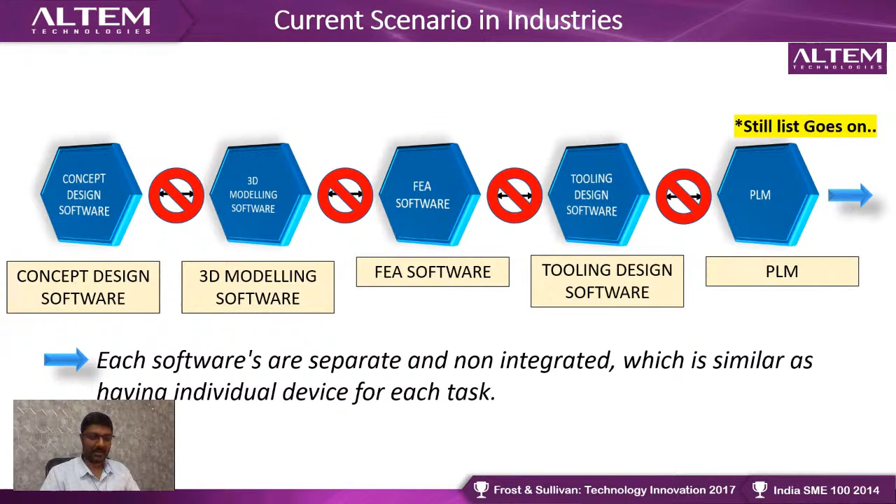Similarly, if you compare this with the mechanical industries in the current scenario, there are many areas with respect to the design field. Conceptual design software is available, 3D modeling software is available, FEA, finite element analysis software is available, tooling design software is available, PLM, product lifecycle management software is available. Each of these software is non-integrated, and working together as a team is very difficult. So what is the problem with non-integrated applications?

Suppose we take the example of the offerings from Dassault Systèmes. Dassault Systèmes has CATIA V5 for modeling, and they have Simulia for doing simulation. If you create a part in CATIA V5 and save it, the extension of the part is .CATPart. But if you see the Simulia software, the input to Simulia cannot be a .CATPart. So the .CATPart file needs to be converted into a neutral data format, that is either STEP or IGS.

And that IGS or STEP file can be an input to the Simulia software. During this process, whenever you convert the .CATPart to the neutral data format, there is data loss, which is not professional and which is not recommended. So the companies will face some losses.

With the 3DEXPERIENCE platform, everything is interconnected. No need to convert to the neutral data format. The PLM software is designed in such a way that the CATPart, or directly the file from CATIA, can be integrated and opened in Simulia.

No history is maintained, like life cycle state, revision, modification, data location. So each department in the company will have the same file, but each person will have different revisions of the same part. Tracking that, and ensuring that all the departments have the updated design or updated parts, is a very difficult task.

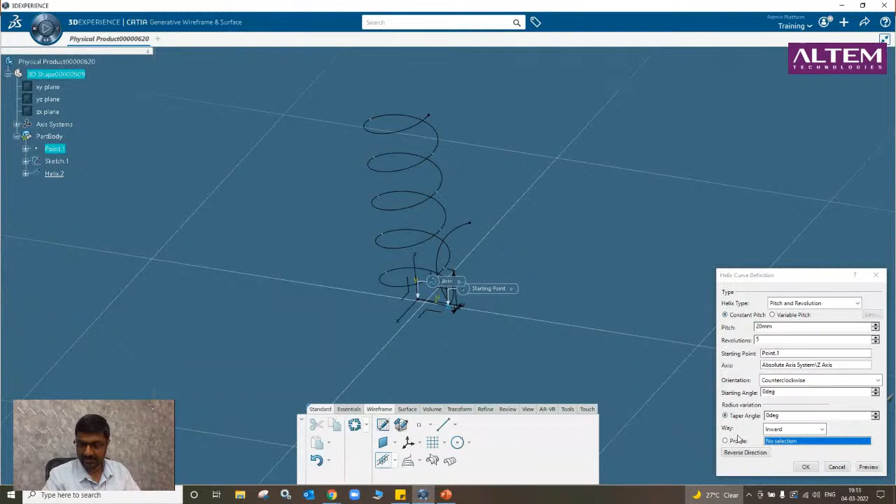Let's see. Okay. Now it is asking for a profile. I will select this profile. The origin is not on the profile. Okay. Okay, this point now, what I will do, I will give it as 0. Okay, now it will work.

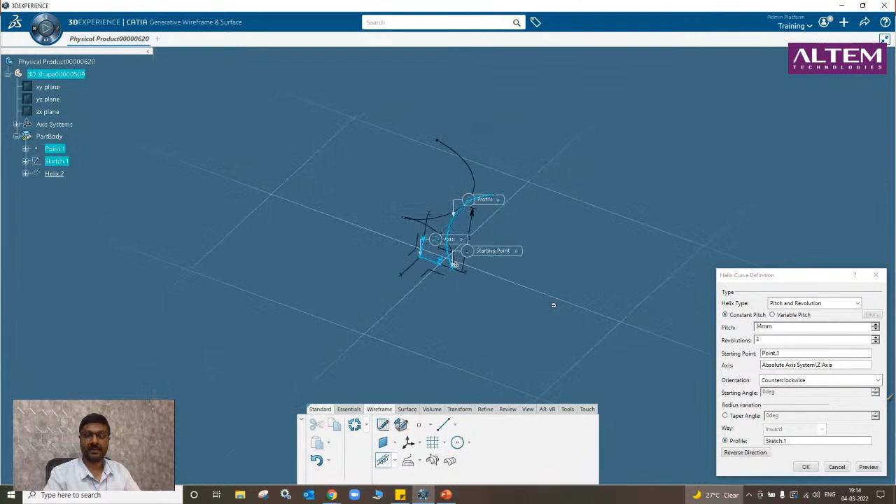First point, Z axis, some 20 mm, some 5 revolutions, and now I'll give it. If you can see, okay, I will give height and pitch.

Okay, it is trying to follow the... If you can see, it is trying to follow this profile. So if you want a spring to follow a certain profile, it is possible. Now I will hide this. Okay. Now what I will do is I will show you how you can build a surface using this wireframe or the profile.

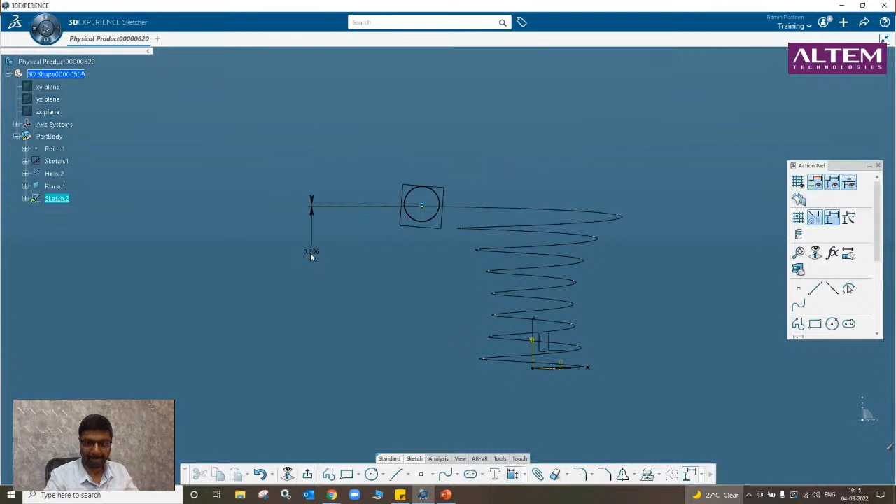I will create a plane. Okay. Normal to the curve. Select this curve and I will select this point. I will take a sketch on this plane. And I will draw a small circle. I will give coincide. Draw a small circle. I'll come out, and there is an option called sweep.

We will get into that. I will explain you the complete sweep option. Yeah. I'm not able to find the sweep option. Sweep. Okay, with reference surface, I'll click this and I'll click this, and you can see a surface is formed. Okay, I will hide this wireframe.

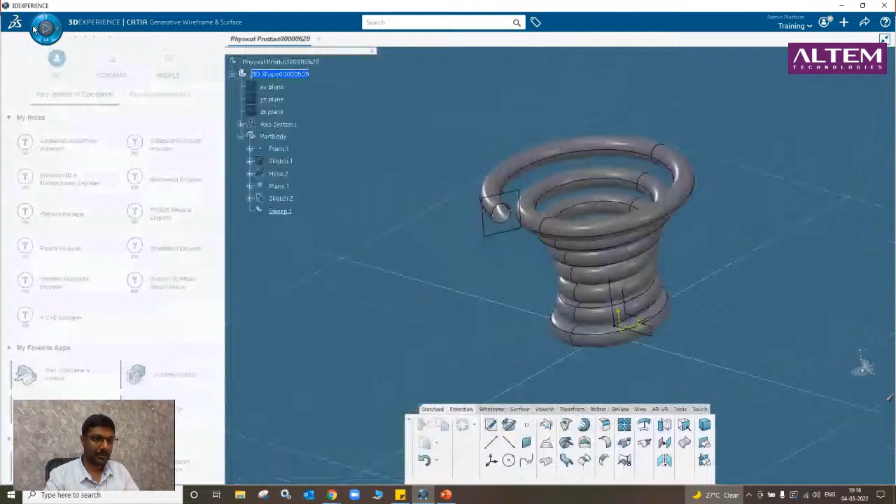Okay, I am in generative wireframe and surface. I will go to the part design workbench. Okay, and there is something called close surface. We can convert this surface into solid. Close surface. I'll click on the surface and I'll click OK. Now I will hide this surface.

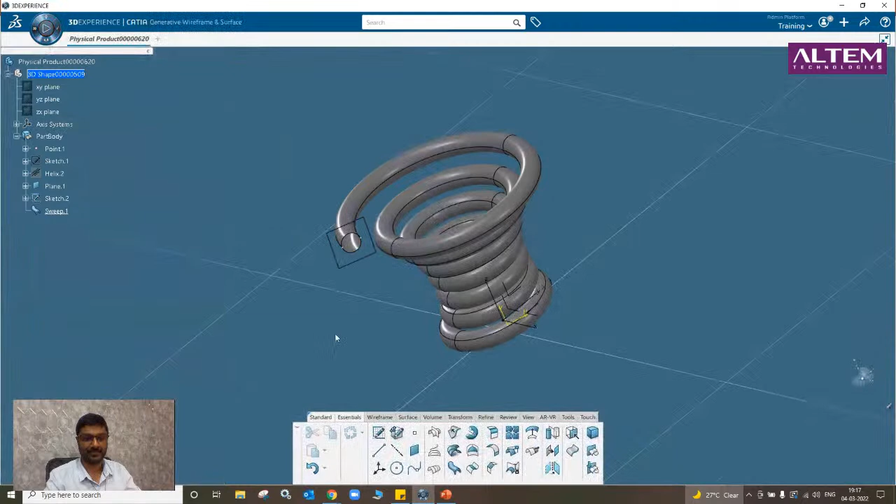Sweep. Okay. Now if I go to review and if I go for section, you can see this is a solid. So this is how you can create a surface and you can close it to make it a solid. Okay. Let me delete all of this.

The second one is the spiral. So what I will do, similarly, I'll create one more point on this XY plane and I will go on the spiral. It is asking for the support. I'll give as XY plane. It is asking for the center point and it is asking for the reference. So it is not possible.

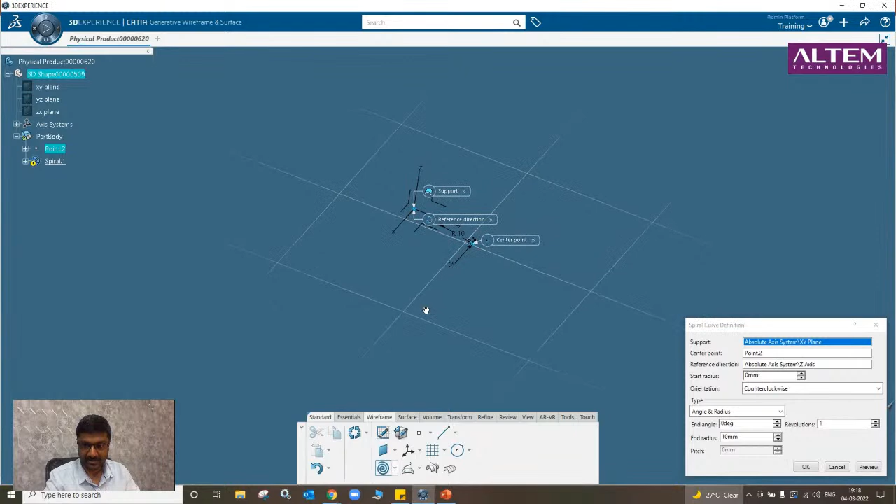Center point as this and reference direction as Z, or reference direction as Y, because this is 2D. And in the same way, there are angle, pitch, and radius. Okay, and we can create the spiral. This is the spiral option. This is one more way of creating a wireframe.

Okay, on the similar line, there is isoparametric curve, which I will be covering later. Before this, I would like to show about this combine. To show this combine option, I have an example. Okay. So suppose you want to draw these curves on a bottle, these grooves on the bottle.

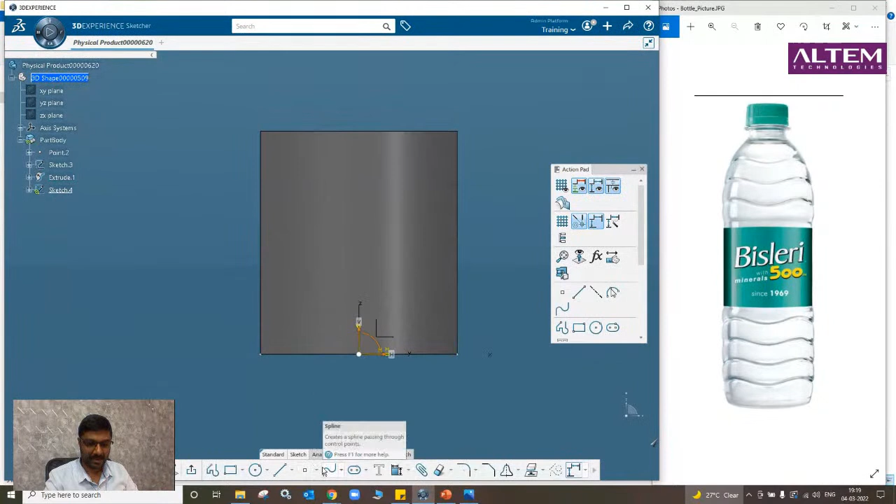So what I will do, I will first take a sketch on the top plane. I will draw a circle. I'll just come out and I will extrude it. I will go through this one by one slowly, but okay. I will click on this. Now I will make a sketch on the front plane and I will take a spline. I just drew some random one, for example purposes. Okay. And I will come out.

Now there is a command called combine. What I will do is select this as curve 1, select this circle as curve 2, and I'll give preview. If you can see, now a wireframe is created. What is the logic?

If I view it in the front view, you can see it is following this sketch 4, and if I view it on the top view, it is a circle. So it has combined both of them. Okay, the requirement or the prerequisite is both the sketches must be normal to each other.

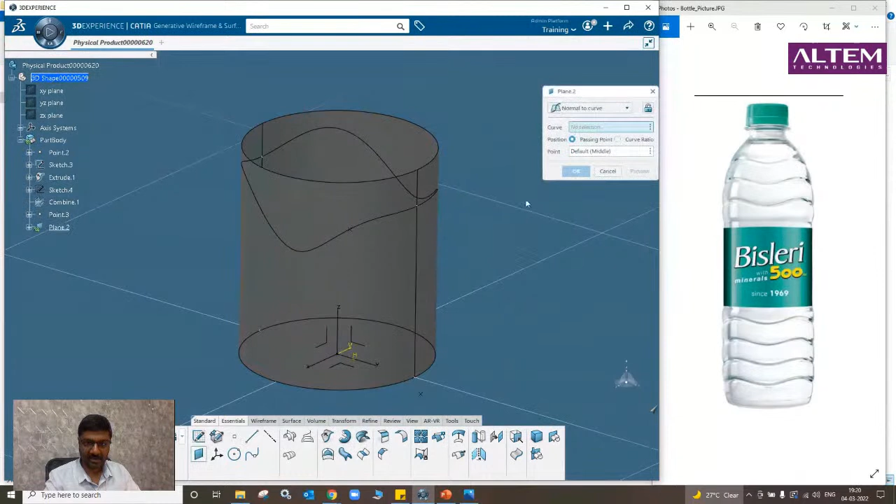Okay. Now again I'll take a point on this curve. I will create a plane normal to the curve at that particular point. Okay. And I will draw a small circle on this plane.

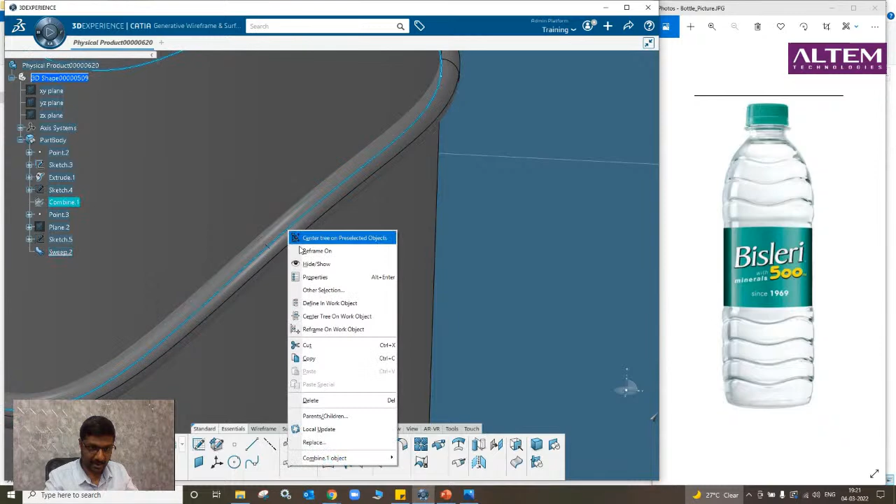Okay. And then I'm going to sweep it. Okay. Now what I'm going to do is I'm going to hide this. Now I'm trying to make a groove. Okay. So there is something called split and trim. I'm going to explain it to you in detail, but as of now, I'll try to explain split and trim.

I will do trim. I'll select this surface and this sweep surface. Okay. And the other side, if you can see, just click OK. Now the groove is done. This is how you can design this groove, which you can see on the Bisleri bottle here. So this is how you can use the combine option to get this kind of groove.

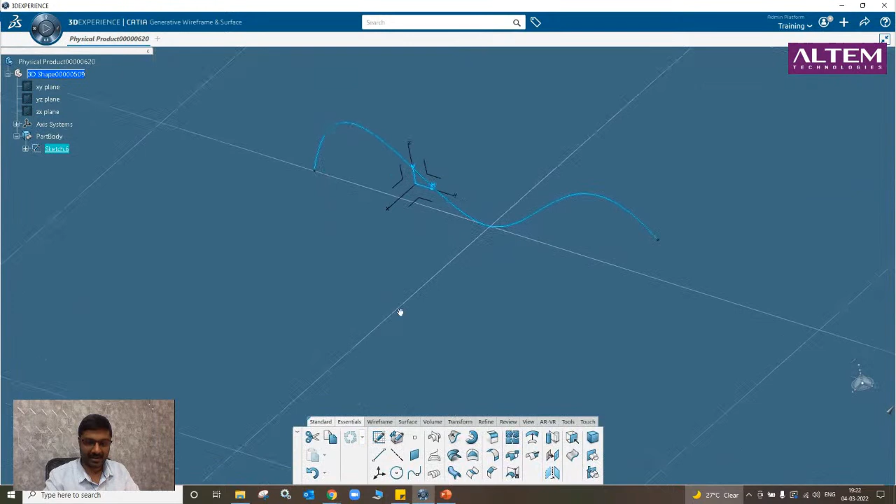So let us move on to the next one. I want to explain about the projection. Say suppose I take a sketch and I will draw a spline. Okay. And I will extrude this. I will take a plane, offset it, and I will draw a circle on that plane. Now I will hide this. Now I will extrude this circle.

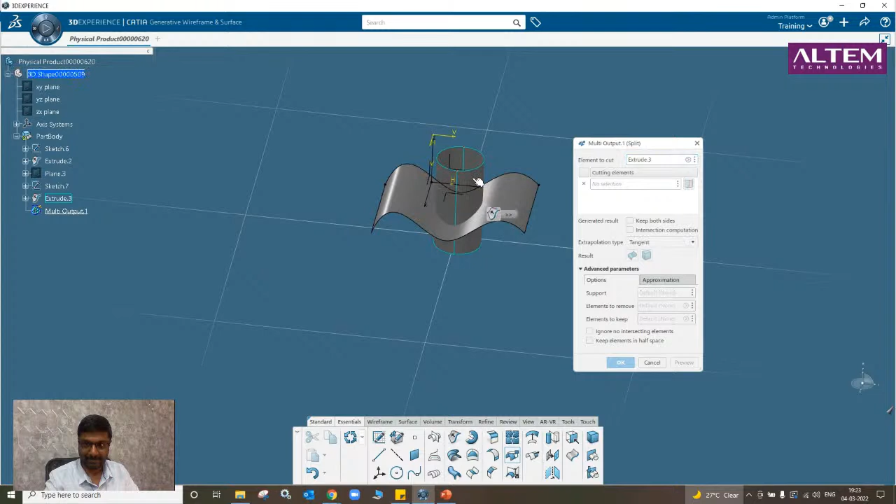Now I will do a split operation. Sorry. You can see there's a circular hole. But what happens if I do projection? I will project this circle onto this plane. You can see it is coming as an ellipse. It is not coming as a circle.

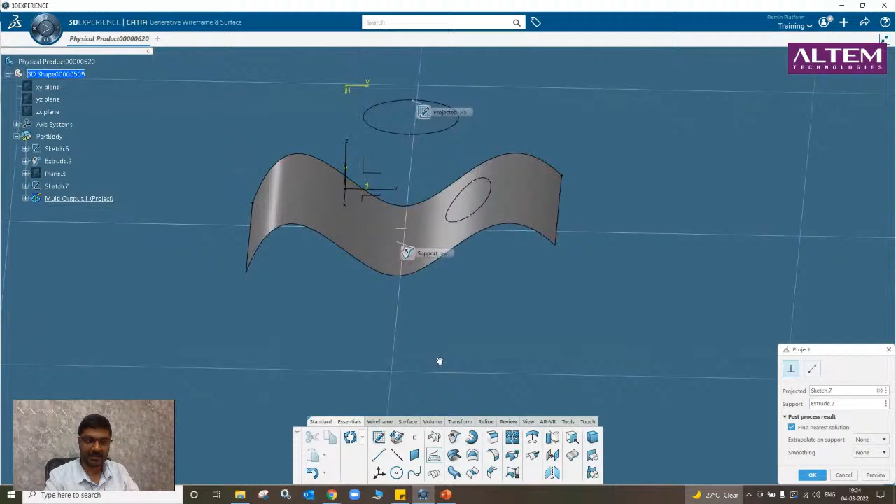So this is what the projection will do. It will try to adapt to the shape of the curve. It is circular, but it is taking the shape of the curve. Hence, it is appearing to look like an ellipse for us. This is where you can use the projection command.

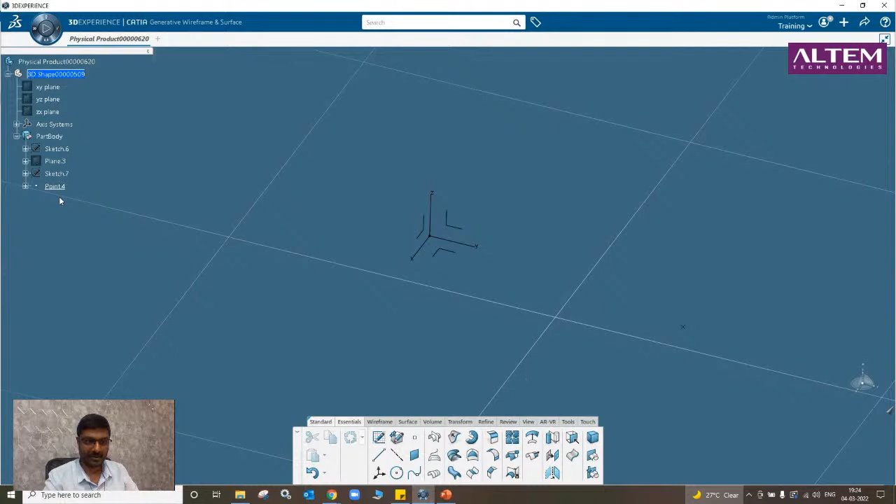Next, I would like to show one more thing. So suppose there is a random point somewhere. I will give some 100, 250. There's a point somewhere here. I'll delete all of this. So this is one point. I'll create one more point just on the ZX plane. Now these 2 points are in space.

Now what I will do is I will take a line and I will give it a Z axis. I'll create a line. I'll give a Y axis. Now I want to connect these two lines. Let me look at that option. There is an option called connect curve. So this is the first point and this is the first curve. This is the second point and this is the second curve. If you want a reverse, you can.

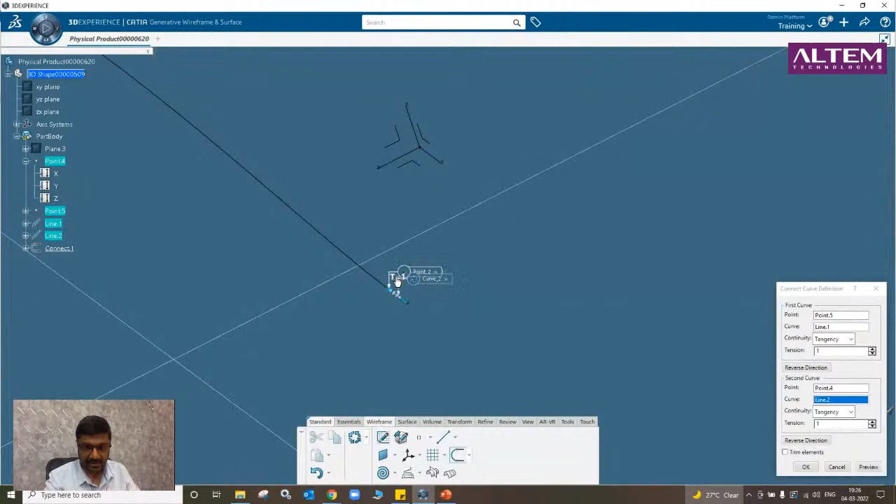So this is a 3D curve. You can change the direction of the tangency. You can change the tension. And you can connect these two curves in 3D. This is the connect curve option. These options will be very useful while you're working with surface design.

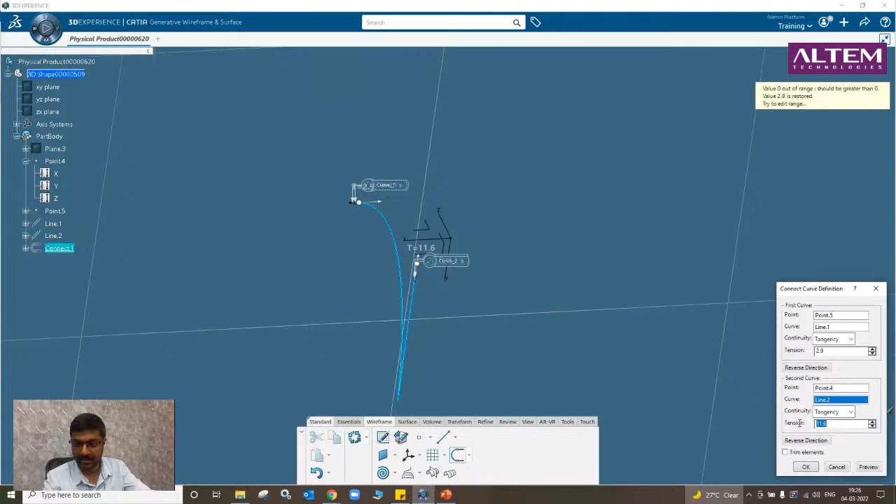This is the vectors. I can give 0, 0. Or I can give 1. Sorry. 1 and 1. I think the tangency should be opposite. This is the connect curve option. So these are some of the important wireframe features which I wanted to highlight and show here.

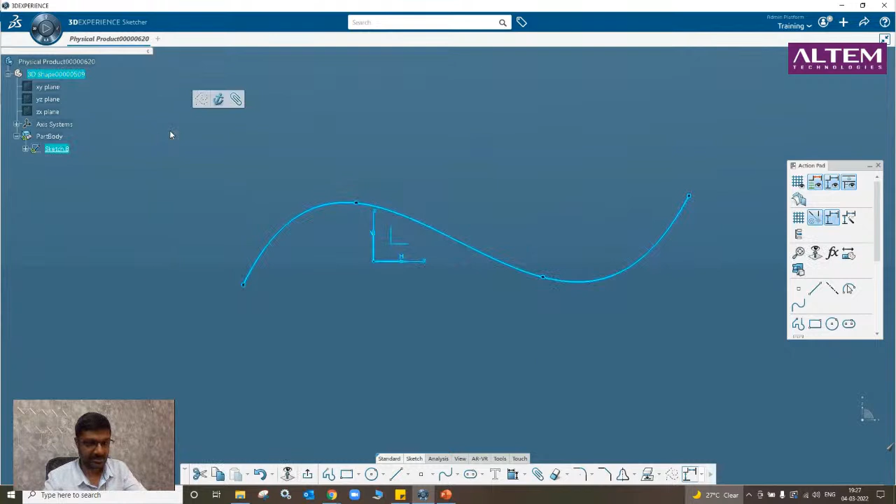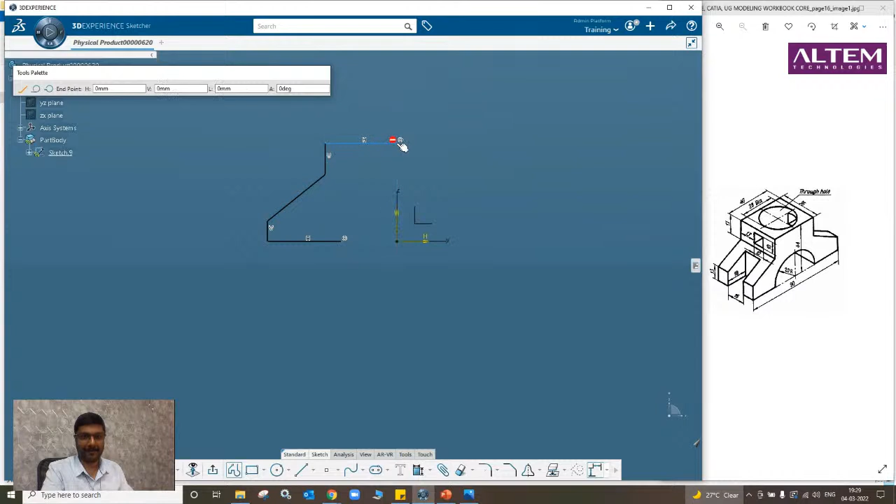So what is the start? How do we start if we have to design this in surface design? First, I'm going to develop this surface, which I'm showing with my mouse, only this front surface. I'm not going to draw to scale. I'm just going to draw rough dimensions in the interest of time. Let me draw this, and I will mirror this. Now I will draw a 3-point curve. First point and second point.

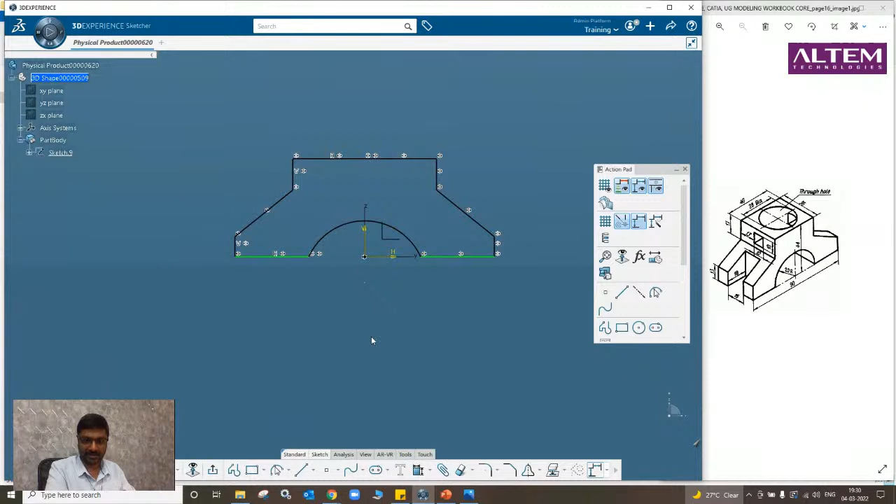And I'll come out of the sketch. Now I have drawn this sketch. Actually, I should have drawn it in the left hand side view. Okay, this is correct. Now I will do fill. There is an option called fill in the surface design, and I'll fill the sketch. You can see my first surface has been now created.

We have to make sure that all the surface design we do under a geometrical set. Okay, we must not do it under part body. So what I will do, I will create a geometrical set. I will cut and paste it in the geometrical set. Okay. Now I will hide this sketch. Okay. Our first surface is now ready.

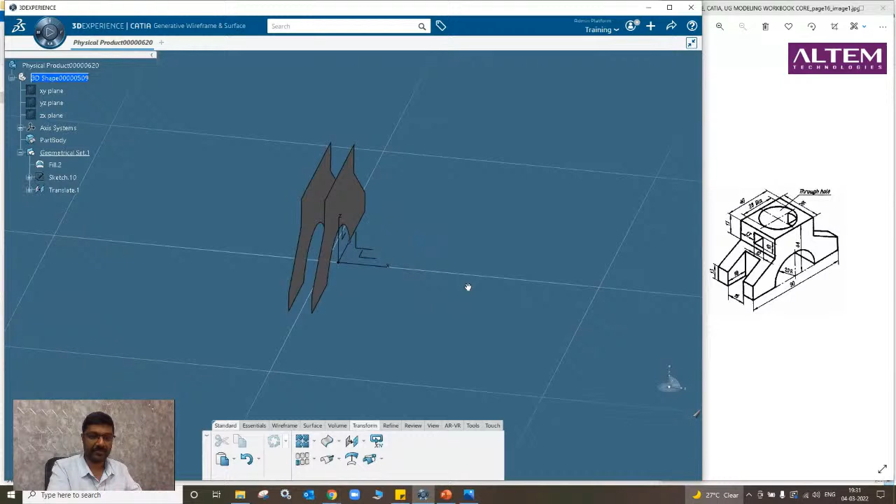I need a similar surface at a distance of 36 mm. So what I will do, I will go to the transform and I will translate it. I'll select this. I'll select this direction. I'll give it as 36 mm. Okay. Minus 36. Okay. Now, actually, I'll give it more so that it looks to scale. I will give around 100 mm.

Okay. Now I need to create the top surface. So what I will do, I will draw a line between these two. This is also part of wireframe, and I'll draw two lines. Now I can fill this, or I can use extrude. So what I will do, I'll go to tools, I'll measure this length, from this point to this point. I'll keep this length.

Now I will come for extrude. I can select any open profile, give the direction, and get it extruded. I will give length 217.568. Okay, and I will hide this. So now this top surface is formed.

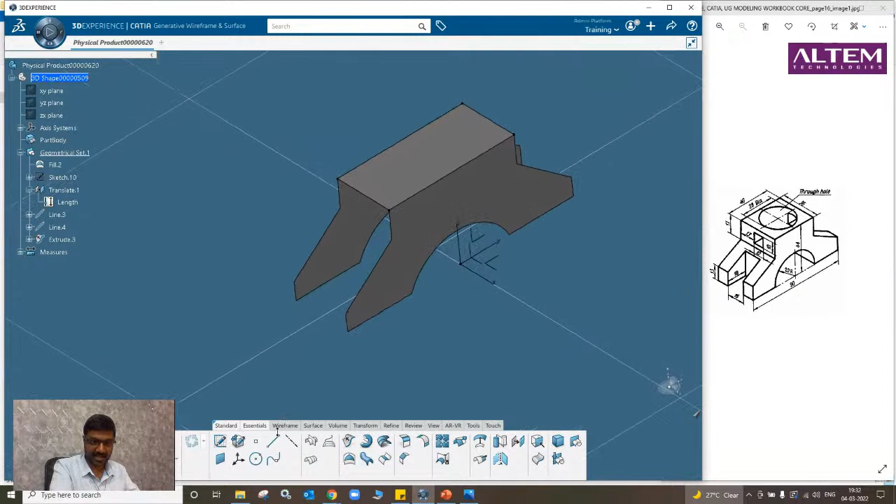Now what about these side surfaces? I'll again draw one more line between these 2 points, and I will use fill. I must select all the edges. Okay, and I will fill. I will take one more line and I will fill. And I will fill this: 1, 2, 3, and 4. Similar way, I will draw the last line and I will fill this: 2, 3, and 4.

Okay. Now I will mirror these three surfaces. Transform and mirror. Symmetry. Yes. Now the surfaces are formed. Now you can see each one is separate; if I hide this one, only this is hiding. So each one is a different surface. I will show you, we can join those. First, let me complete it. There are some small things pending.

Okay, and I will fill up this: 1, 2, 3, and 4. Last line here and here, and I'll fill it: 1, 2, 3, and 4. Now I'll fill up this: 1, 2, 3, and 4. Okay. Now all the surfaces have been generated.

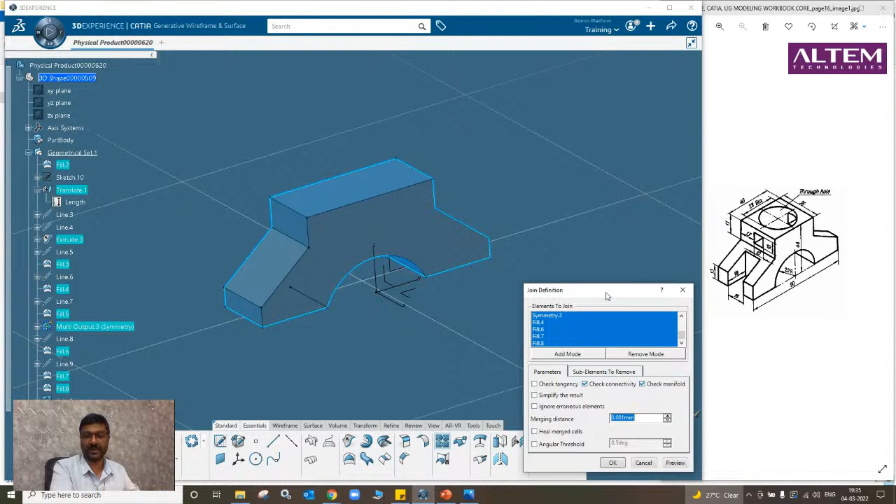Now I need to make this as one surface. So there is an operation or command called join. Click on this. I will click on one surface, right click, and I'll get distance propagation. If you can see, there is a value called merging distance. If there is a gap smaller than 0.001, it is going to ignore it. You can set this as 0.001. So if there is a gap of less than 0.001, it will ignore it and create one surface. Now if you see, it has become one entity.

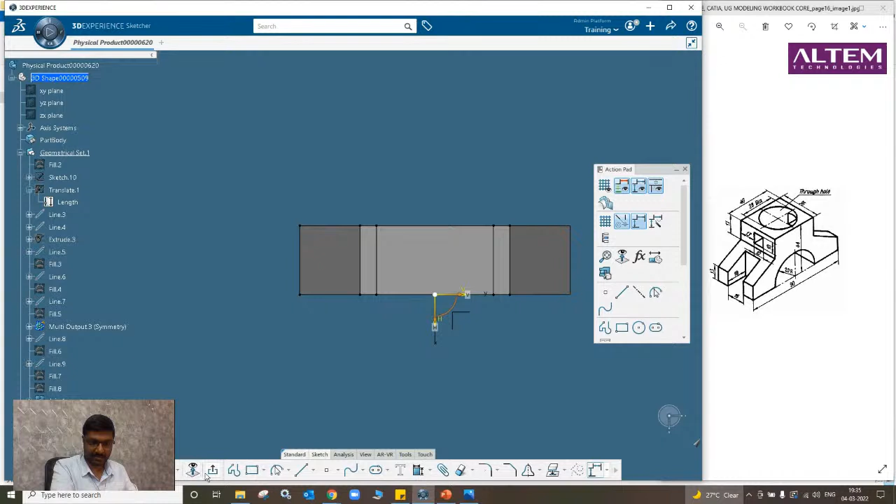Okay, this is done. Now what else is remaining? There is a through hole on the top. I will draw a circle here. Or without going into the sketching, there is an option called circle. For that, I will delete this. I will take this circle. I will draw a point on surface, and I'll give a zero value. Oops, something is wrong. Surface is this extrude, and I'll give value as 0. Okay, a point on the center of the surface is formed.

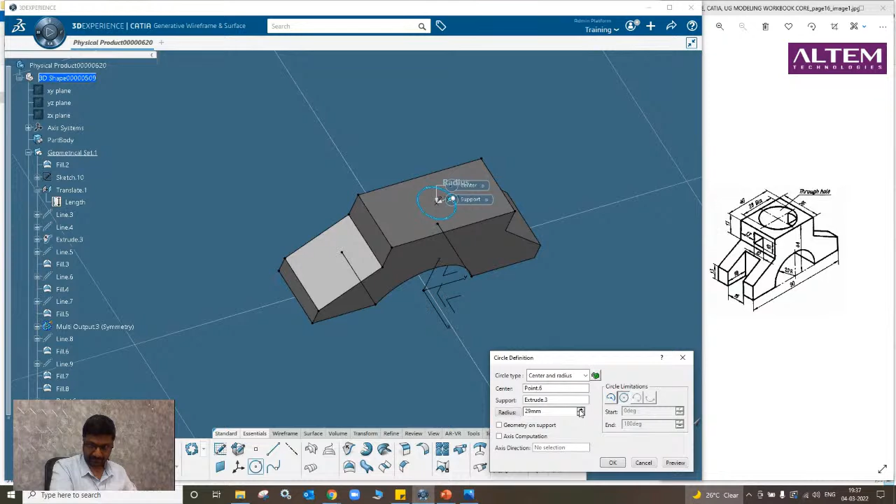I will go to the circle. Remember, I'm not going into the sketching. You can do it in sketching, and you can do it in wireframe also. There are multiple ways to create circles here. I'll create center and radius. Center. Okay, this is the support, and I'll draw full circle. I'll give radius, whatever value I want. I'll click on OK. Now I will extrude this at both the ends.

Okay. Before this, I would like to explain what is split and trim. I will show you in a separate part so that it will be very easy for you. I will draw one line and I will extrude it. Okay. I will take one more sketch.

Come out and I will extrude it. Okay. Now there are two operations. Please concentrate, this is very important. One is split and one is trim. Let us understand one by one. First, I will go for split.

What is split? It is like you want to cut one surface with respect to another surface. It asks for two elements: element to cut and cutting element. It is like, you remember, you are having an axe and you are having a tree. So element to cut in this case is the tree. So you're going to select a surface which is going to get cut. I want to cut this surface. With respect to which is your axe, the second surface is my axe.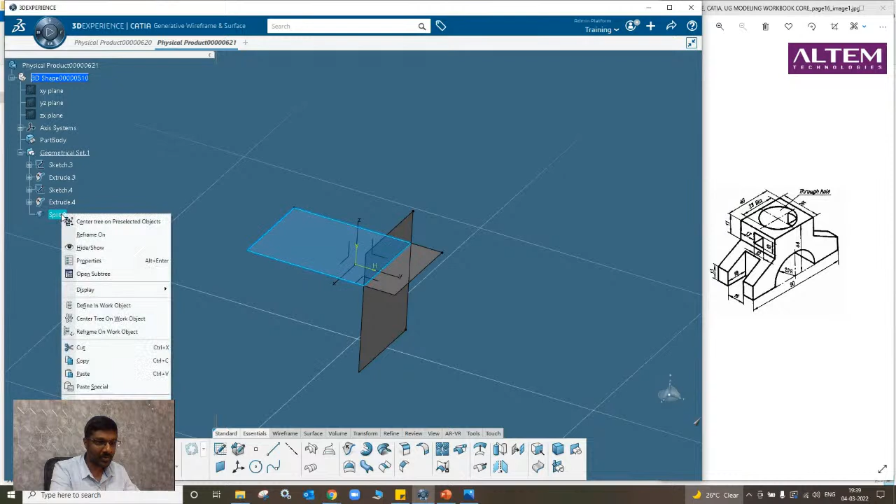See, I am not doing this in the geometrical set, and that is why it is very important for us to always follow the norms with respect to how it should be on the tree. Okay, now I will hide. Sorry, I haven't performed this, but I'll define the split. Click on. Okay, I will cut this element with respect to this and I'll click OK.

Now if you see, the split has happened. If you go to the hidden workspace, you can see the full surface. If I unhide this, you can see both the surfaces. If you go to the workspace and unhide this. So no matter what, the surface will never get deleted. It will just get hidden. Okay, now, sorry.

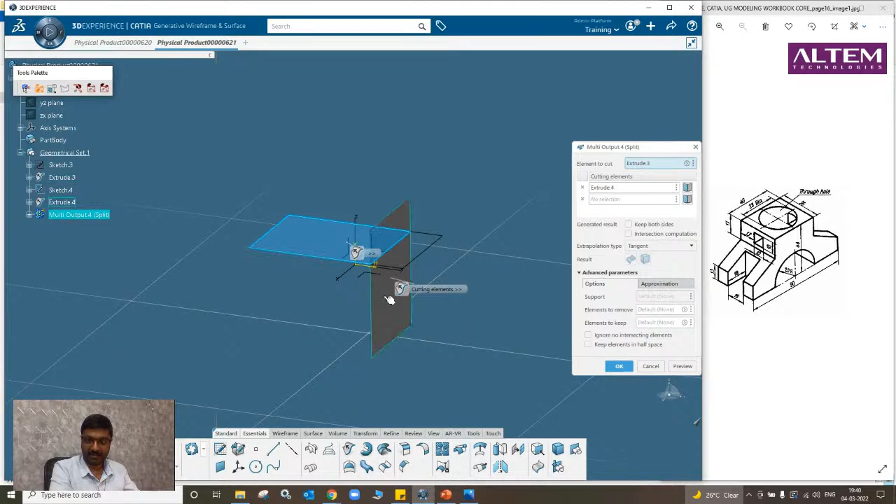Okay, now I will reverse this. I will make this as element to cut. So I will reverse. Reverse is also possible. Cut this surface with respect to this surface. Now I want to cut this surface also. I will perform one more split. This time I will cut this with respect to this. And you can see. So this is about the split.

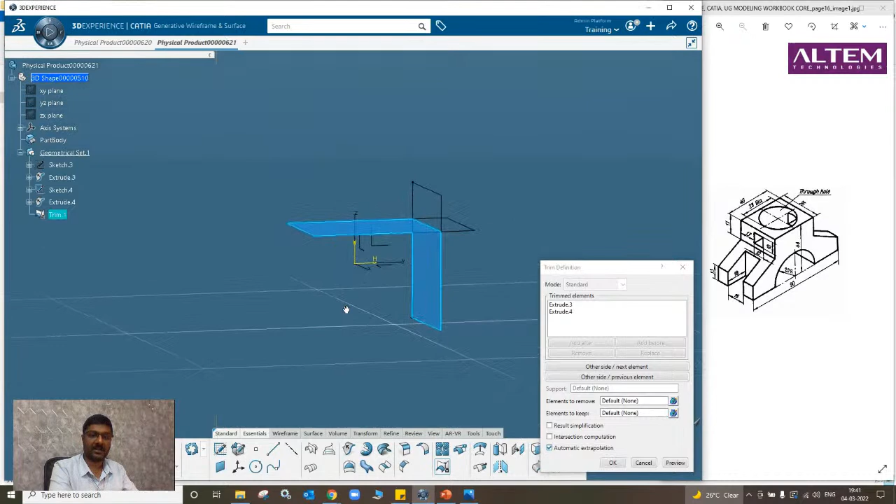Now what is trim? If you go for the trim option, there is no cutting element and element to cut. You have to select two surfaces. Now if you can see, trim is equal to double split. Whatever can be achieved using split two times, the same thing can be achieved with trim in a single command. This is the major difference between split and trim. I hope you understood.

Here in trim you have various options for which portions you want to retain. If you can see, I am changing the options here and I am getting various results. So this is the split and trim command. Here I will show you. I will use the split command. Now in our case, our element to cut is this solid. So what I need to do is hide this and make this into a complete solid.

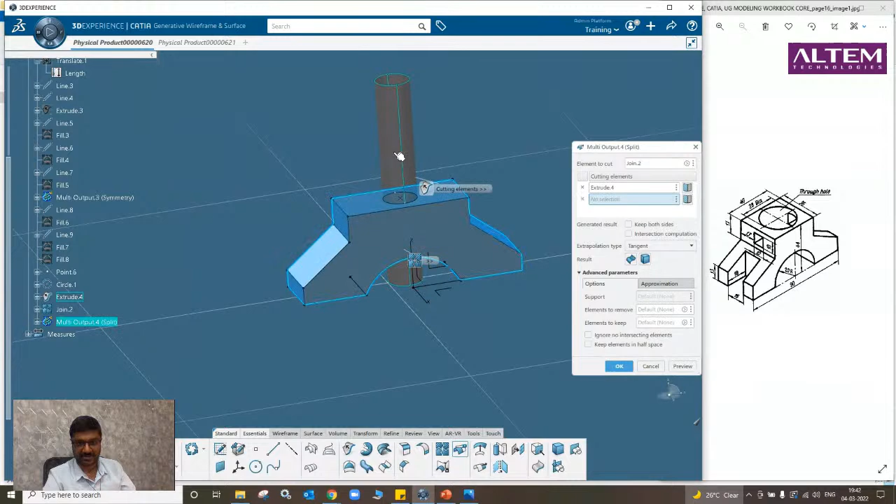Okay. Now I will split this with respect to this. And I will hide this, you can see. But now this cannot be converted into solid. So what I need to do is, oh yeah, what happened? I'll extrude this.

I will split this with this. And I'll unhide this. Now this cannot be converted to solid. So I will now split this cylinder with respect to this. Sorry, here we need to change this. Now if you can see, this can be converted to solid.

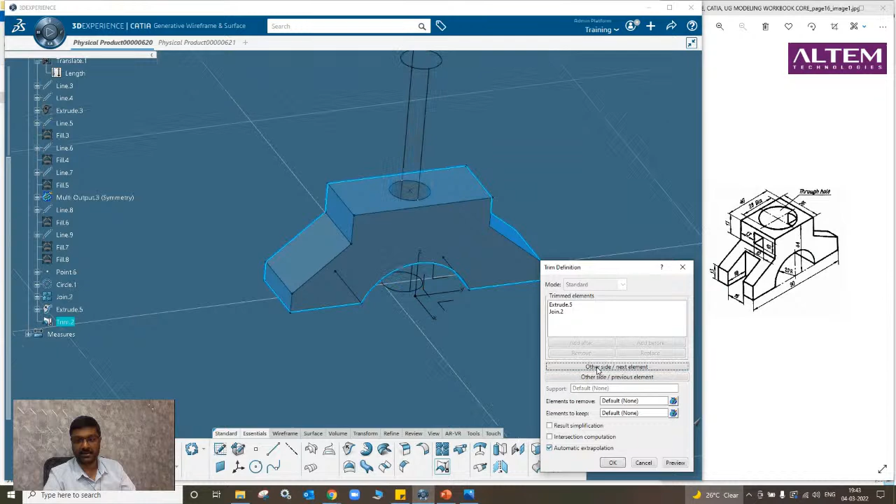So instead of two splits, we can achieve the same result using trim. This one and this one and other side. So this is what I was talking about. Double split is equal to trim. Now I'll go to the part design workbench and I will go for close surface. I will hide this trim. And now if I go for review, it will be a solid.

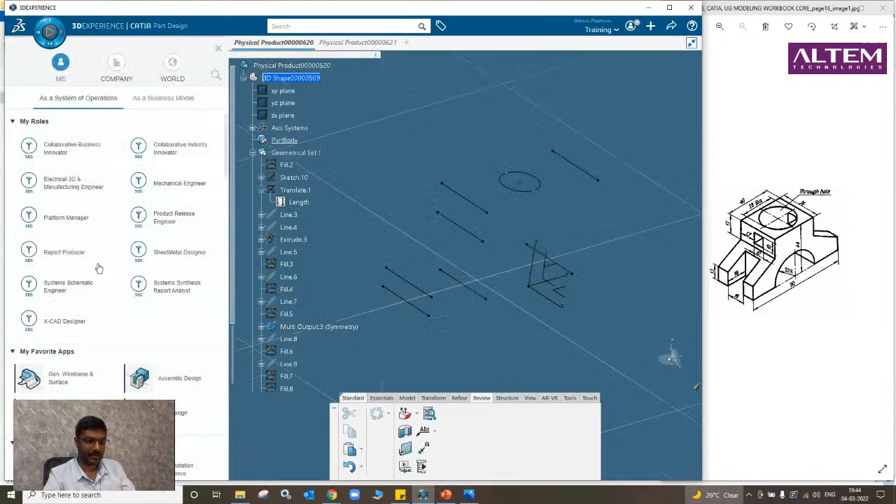Now I'll delete this close surface and I'll go back to the surface design workbench and hide this trim. I hope until now it is clear. Now I want to make this cutout. So I will select geometry tools, select workbench. I will go here and I want to draw a sketch here.

So I will draw a rectangle. Remember that you have to draw something outside the required cutting area also. And I will extrude this to whatever length I require.

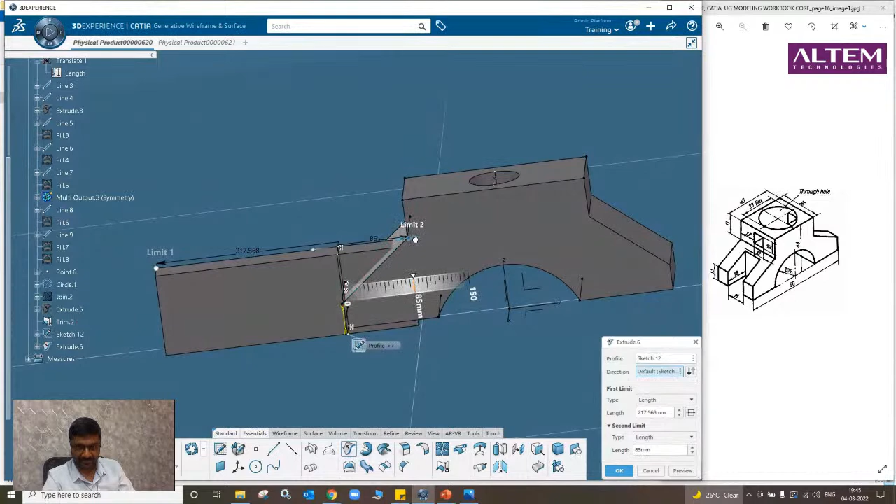Okay, what I will do is hide this and fill this. 1, 2, 3, and 4, and I will join these two, extrude and fill.

The join operation will work if you don't want any surface to be part of your join. You can hide those surfaces. Now only these two surfaces are in the show space, everything else is in the hidden space. So only these two surfaces.

So I'll go for trim. Select these two surfaces, and I will hide this. See. Before doing this, since we want to do it on both the ends, I will mirror this join.

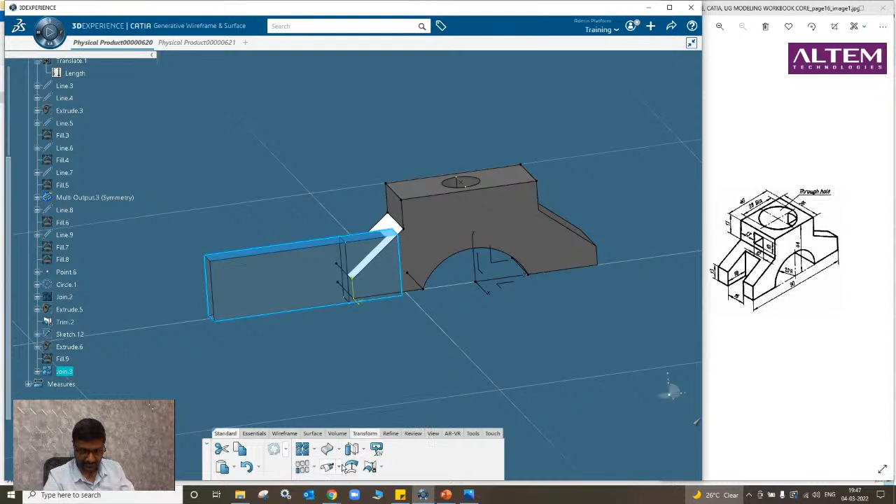Now I have to perform trim on both the sides. This surface, and trim on this and this. Okay, so now our part is ready.

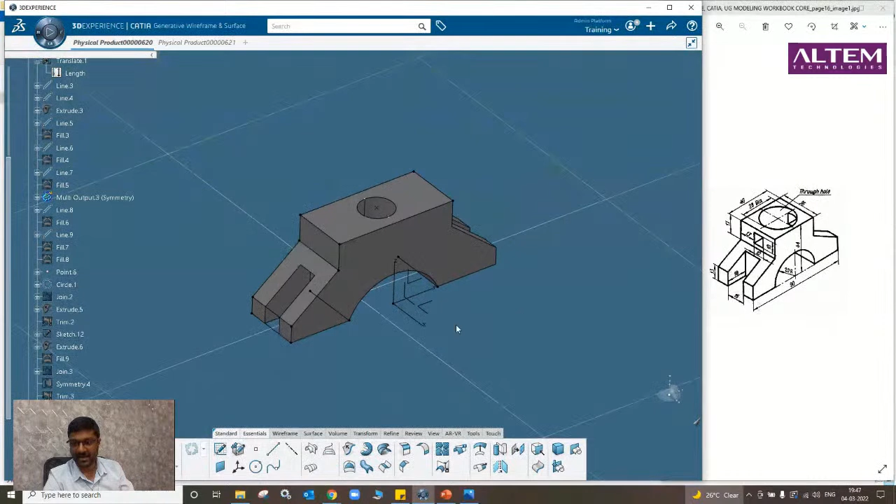This is how you can build this solid or build this part using the surface design workbench. Then you need to convert this into solid, as I have shown you. Now this is a surface. If you want to see, we'll review it. This is a surface. Remember, surface does not have any thickness.

There is one more example. If you want, you can convert this into a solid, but it is not a closed solid. So you can give thickness and make this into solid. Go to part design, model, and you can give thickness to the surface.

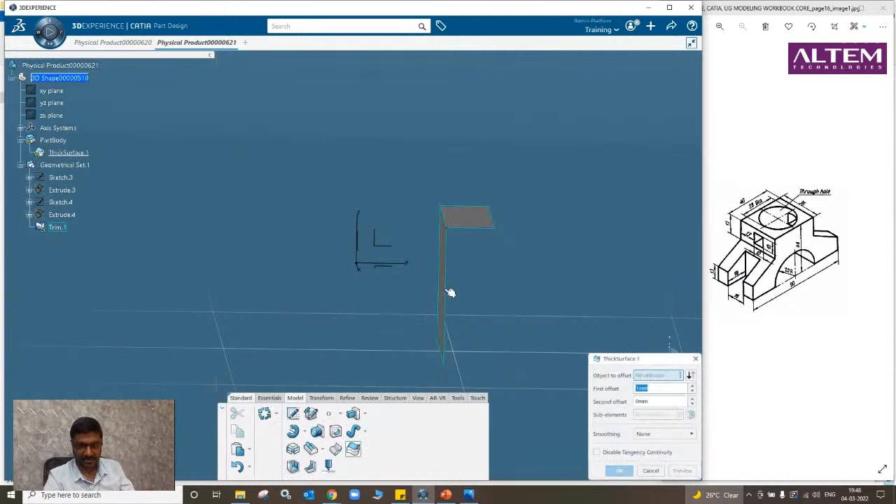Just give 1 mm thickness. I will hide this trim. Now this became a 1 mm thick solid. You can see the thickness here, this space is 1 mm.

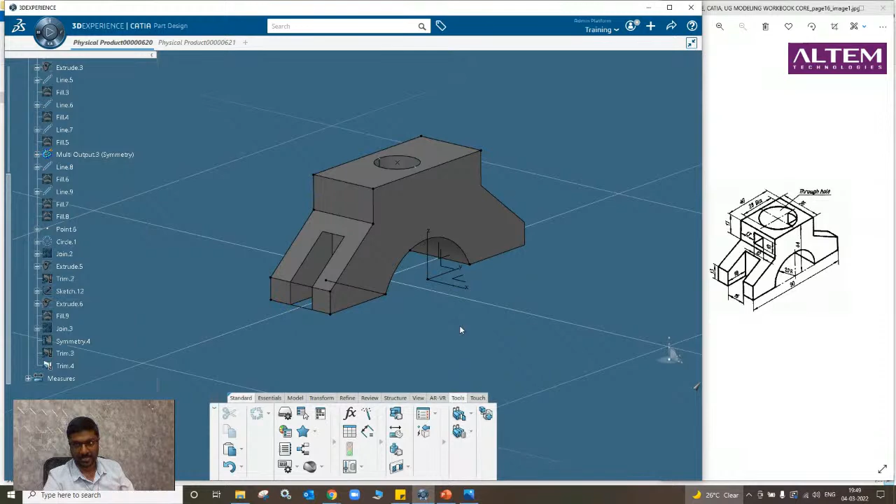Either you can add thickness to the surface, or you can close the surface, make it into a closed surface, and directly convert into a solid by using the closed solid command. These are the two ways how you can convert a surface into a solid. I hope this is clear.

Now let us, I want to explain one more thing here. I will draw a spline. I will come out and extrude this.

Now I want a wireframe on this surface. I will go for this and this. Sorry. Isoparametric curve - I'll just click on this, and if you can see, in X and Y direction you will get a wireframe. And move this. You will get this wireframe.

This is one of the ways how we can create a wireframe. This option is called isoparametric curve, it follows the surface. If you hide, you will get this butterfly shape.

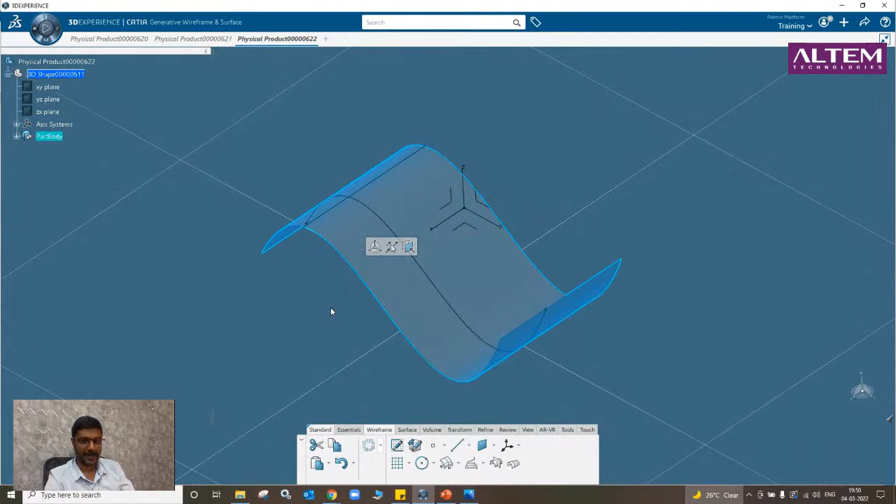Before this, I will extrude this surface. Now say I want to extrapolate the surface, I want to, what do you say, need extension of the surface.

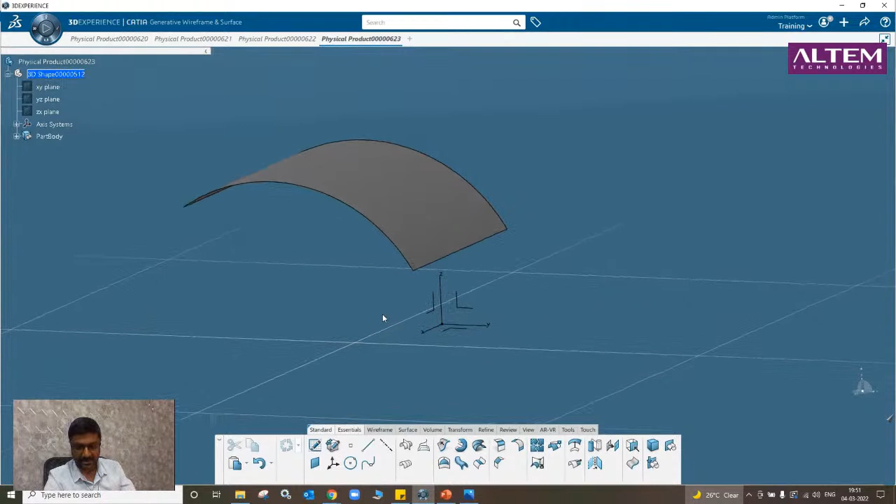This option is called extrapolate. Where is it? There is an option called... okay, what I will do, I will press it. Here there will be an option called extrapolate. I'm looking for this extrapolate. See, extrapolate. I will select this boundary, and it gives me an extension.

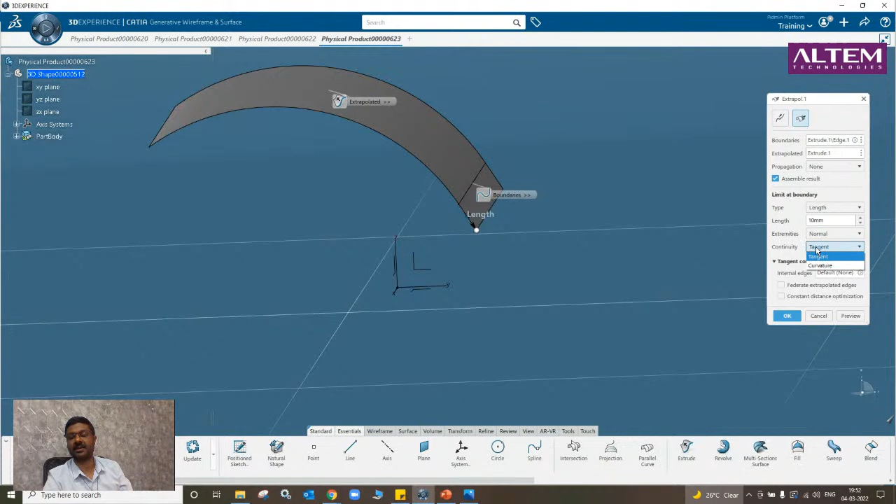Now there is something called continuity, it is very, very important. There are two types of continuity: one is tangency continuity, and one is curvature continuity. So what is the difference? Suppose you are seeing this, I will give the length as 10 mm.

Now if I give OK, there is an edge formed between the two surfaces. If you give tangency continuity, there is an edge which is formed - this is how tangency continuity will work. Now instead of tangency continuity, I will give it as curvature continuity. You can see now it is a smooth edge, there is no edge formed, but it will try to close the circle, it will try to form a circle. This is the difference between tangency continuity and curvature continuity.

Now with this I would like to go here. Say suppose I have got one more surface.

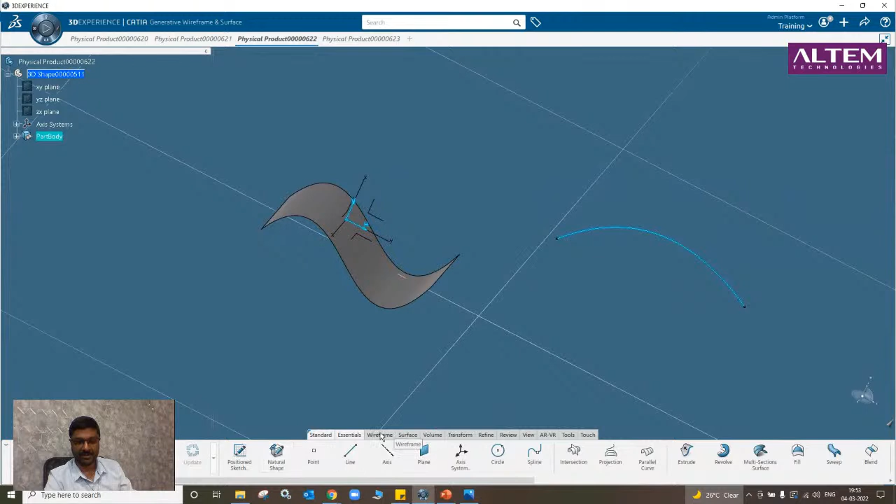Okay, I'll exit the app and explore this. Now I want to join these two surfaces.

For that, there is an option called blend. What I will do is take this first curve, first surface, second curve, and second surface.

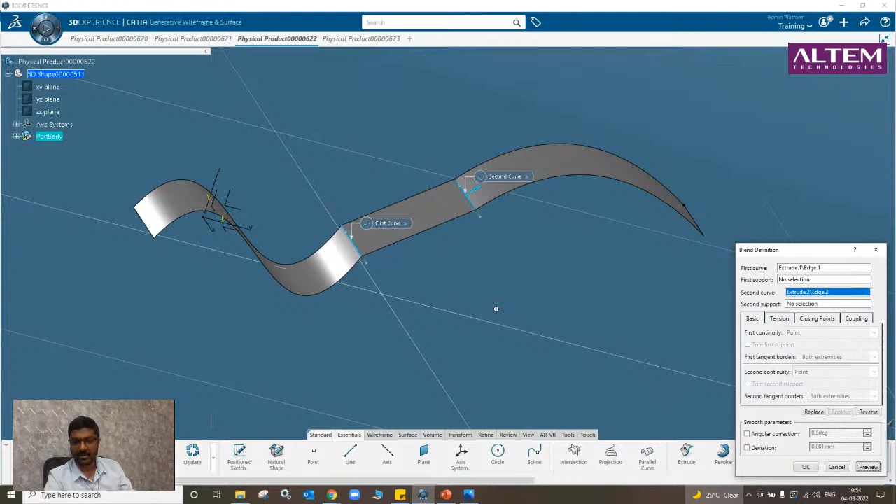Now here, if you see, there is tangency continuity and curvature continuity. What I will do is not give the support for the first curve, and I will give it for the second curve. Now I will join. If you can see, there is no smooth transition between the surfaces.

If I select first support and second support, and choose whether tangency or curvature, and give preview, see how smoothly the surface is trying to join.

And you can change the tension, or you can change the tension and decide how you want the surface to be joined.

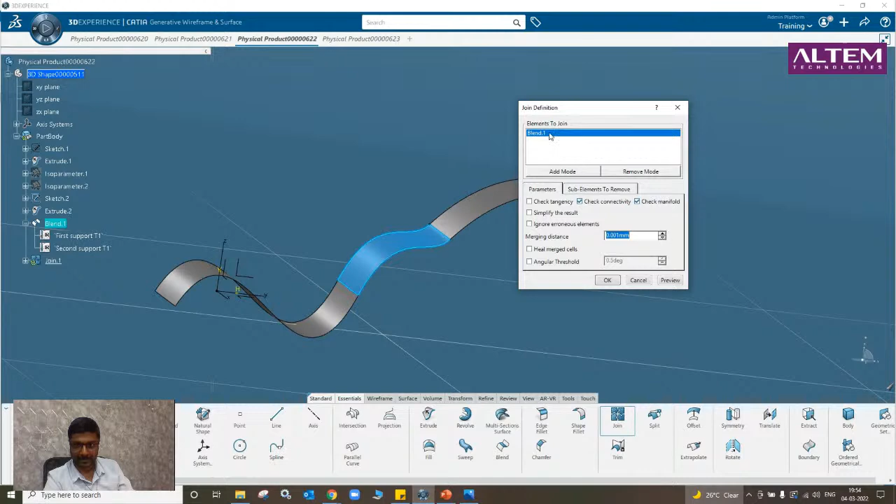Now you can join these three and make it a single surface. Right click, distance propagation, so this now became one single surface. This is how you can use blend to join two surfaces.

Now let us go through some of the other features on how you can create surfaces.

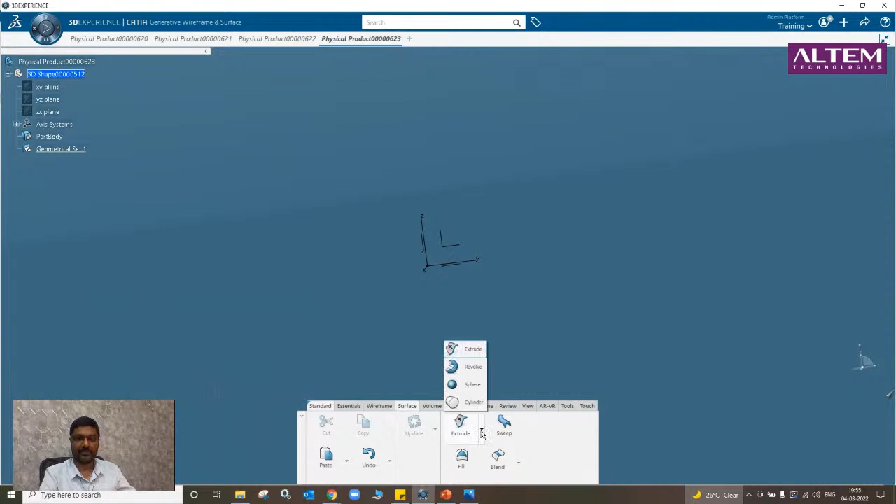Now there is something called sphere. Sphere requires only one input, that is a center point. Apart from that, no other input is required. I'll just specify the center and the sphere is formed. If you want the whole sphere, you can create a whole sphere, or if you want, there are so many parameters. So this is how you can create a sphere.

If you create a whole sphere, it is completely hollow, only the surface. Either you can give thickness or make it full solid, going into the part design workbench.

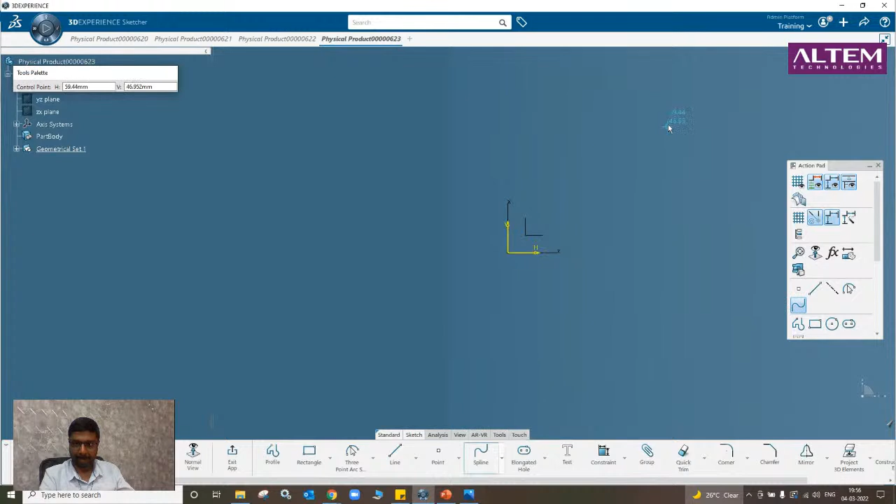Now, apart from that, you can exit the sketch, and then there is something called revolve. Just select the profile and select the axis and see it revolves. You can give 360 degrees.

This is the revolve command. This is how you can create the surfaces you require, depending upon the requirement, you can use the commands.

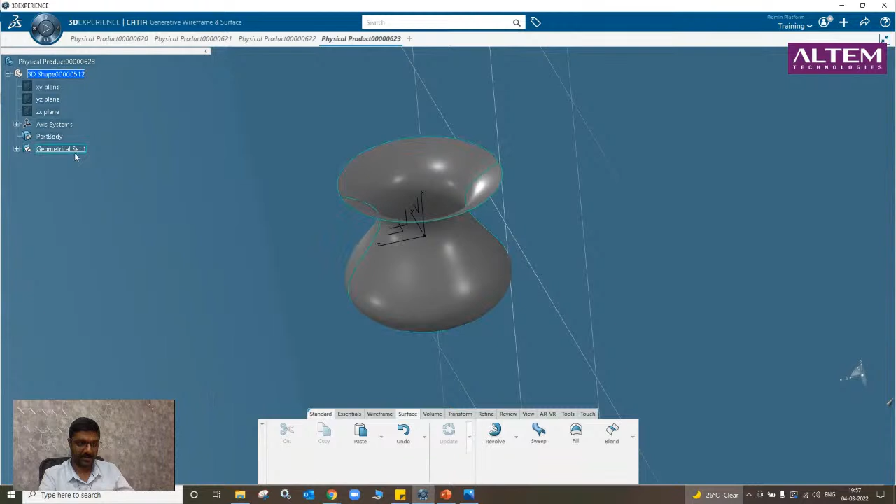Cylinder is also very simple, straightforward. I'll just show you. Cylinder also does not require any input other than a point. It just requires a point and a direction. That's it, the cylinder is formed. You need not draw a circle, extrude, nothing. Just go to cylinder, give a center point, and give the direction.

What is the next option? What are we left with? See the multi-section surface, it's the same, 100% the same options available, whatever was discussed in part design. Only difference is there the solid was getting created, here the surface will get created. So I'll skip this as of now, the options are absolutely the same.

You can refer to the multi-section which was discussed in part design and follow the same procedure. In that, solid was being created; here surface will get created. What are the other things remaining?

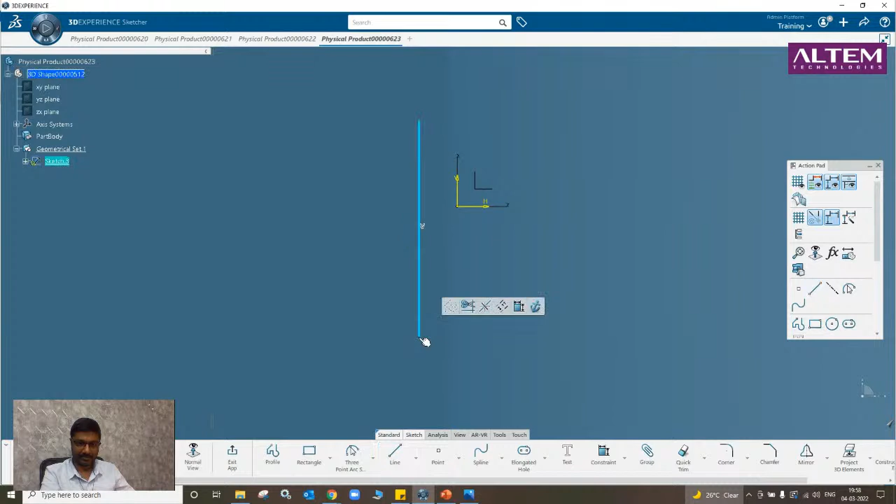I will explain this fillet. This fillet option is really good here. So what I will do is take a line and extrude it. I will draw one more line and extrude it.

Now there is something called shape fillet. What I will do is select the first and the second. You need to ensure that arrows are pointing towards each other, otherwise the shape fillet option will not work. And I'll give it 10 mm.

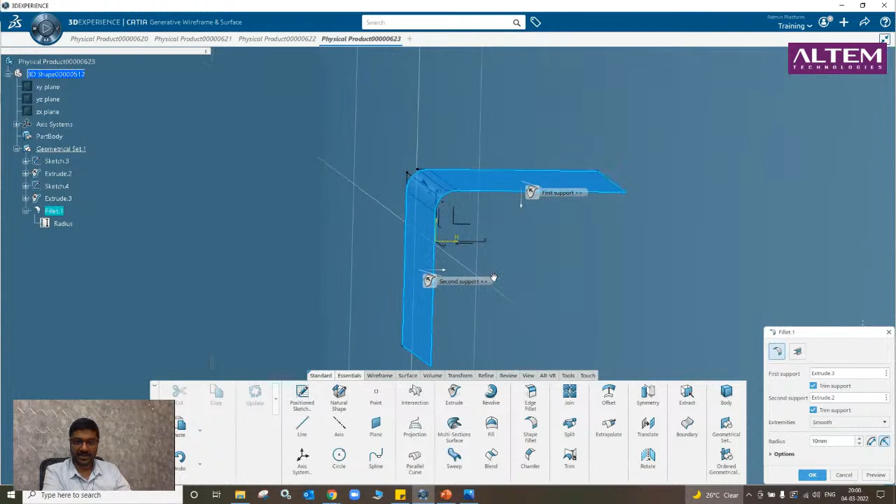Let's see preview. If you can see, although these two surfaces are not joined, it will try to create a fillet and become one entity. Now if you hide the fillet, it became one. But you need to ensure that the arrows are pointing inwards and towards each other, only then this shape fillet will work.

Now what I will do is go to the sketch. I will coincide these two points. Now these two are two separate sketches.

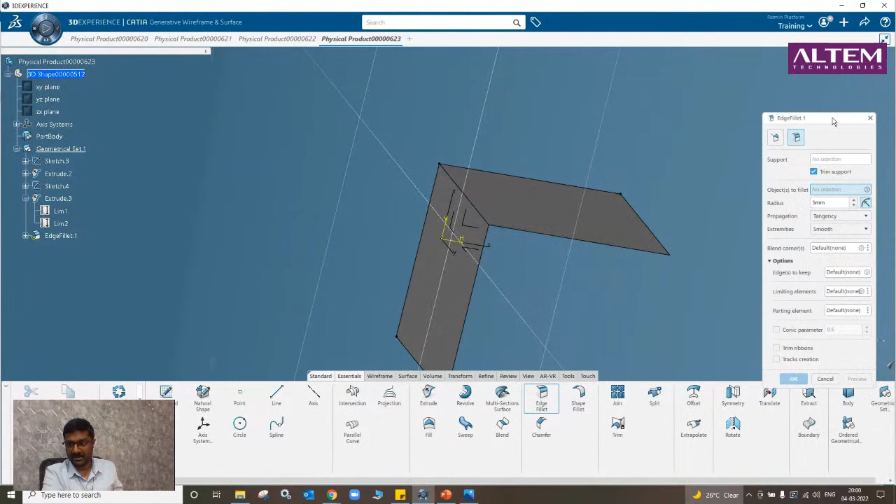I want to have a fillet between this, so what I will do is try to use edge fillet. But if I give edge fillet, I'll not be able to select the edge, because those two surfaces are not one single entity. So if you want to use edge fillet, you need to make sure it is one single entity.

Now see, if you join these two, it will become like this, so now it became a single entity. I will unhide this and use the edge fillet, and give like 5 or whatever it is for the fillet. This is normal edge fillet and this is the shape fillet.

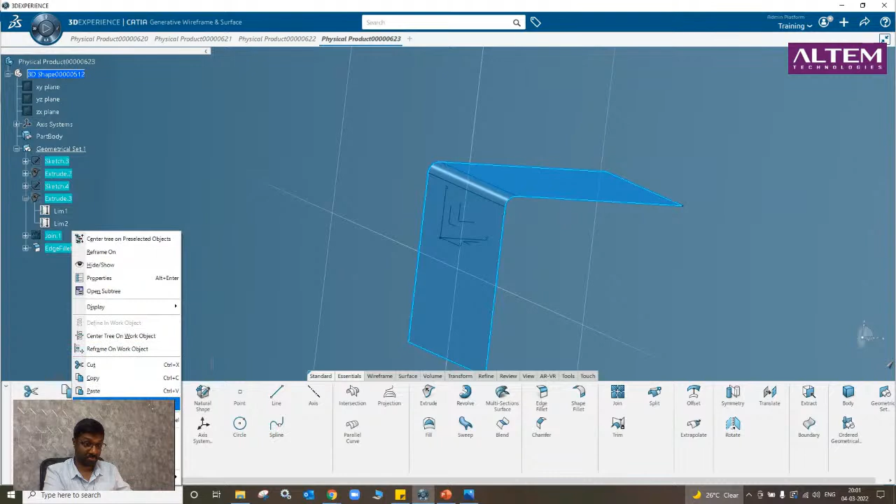Now one more thing I wanted to show you, I forgot. Okay, here only I will show you. Suppose say I will create a sketch.

Okay, and I will extrude it.

Now there is something called offset and translate. What is the difference between the two? I will click here, select the surface and take the distance. The surface will get bigger in size.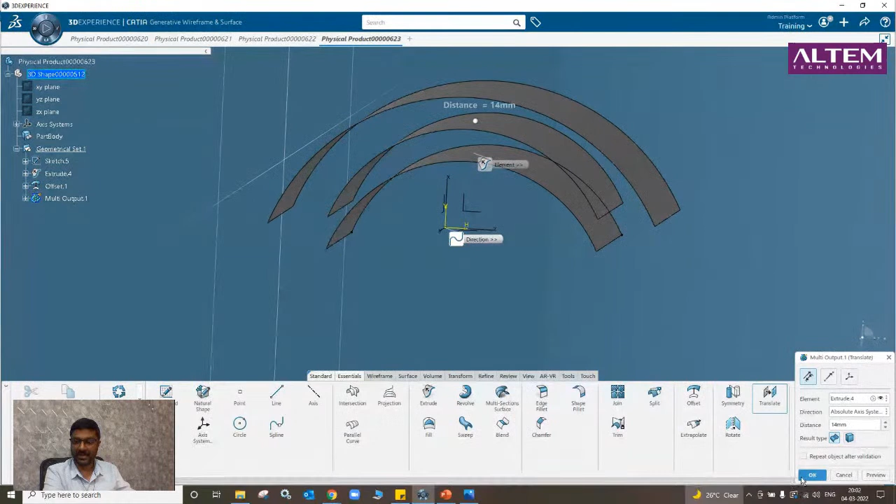But if you translate this in the same direction, the size of the surface will remain the same. But if you offset it in the opposite direction, see, the size of the surface also becomes smaller. But with translate, the size remains the same whether you move it in plus x or minus x direction.

Okay, this is our master surface. All these three are the same size. But if you see offset, the scaling of the surface also happens at the same time. So that is the difference between scaling, offset and translate. Okay.

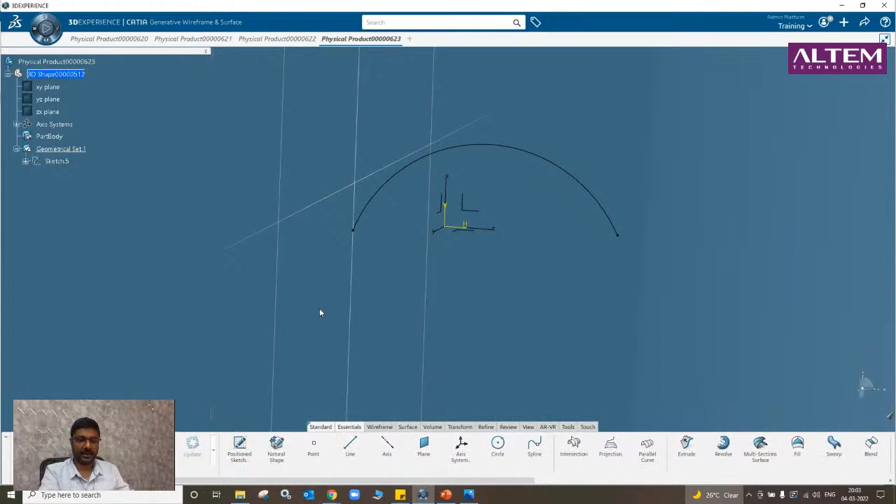Now what else is remaining? Okay, if you go to sweep, there are 21 different types of sweep available.

Actually, I'm not there in the full sheet metal surface design. I have not assigned myself the complete surface design tool, so only basic 5 to 6 types of sweep are available with me presently.

So there are three types: one is explicit, line type, and circular type. If you go for the complete surface design, whatever license I am having is basic surface design. In the basic surface design, there are only 5 varieties of sweep: 3 plus 1 plus 1, five sweeps available with me. But if you go to the complete surface design module, you will be getting 21 varieties of sweep. Now let us explore these 5 types of sweep.

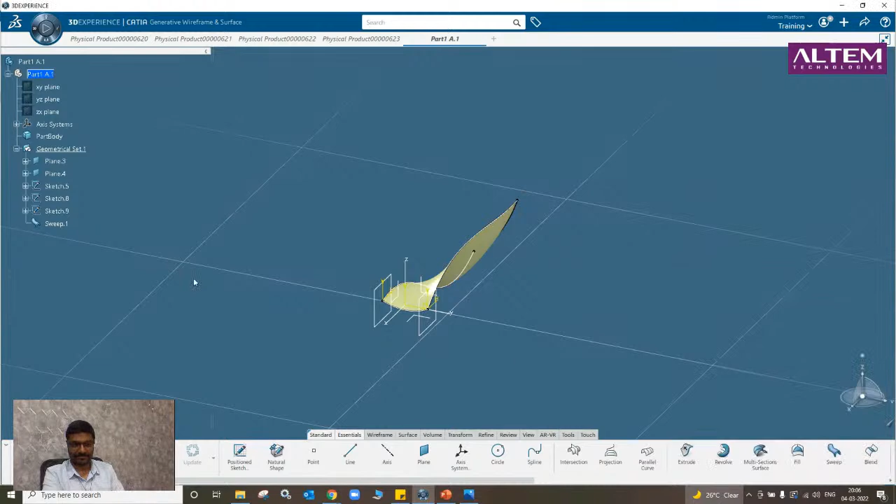Okay, it is fairly easy, this explicit option with two guide curves. Here, if you can see, this is my guide curve one, this is my guide curve two, and this is my profile. In our example, this is guide curve one, this is guide curve two, and this is my profile.

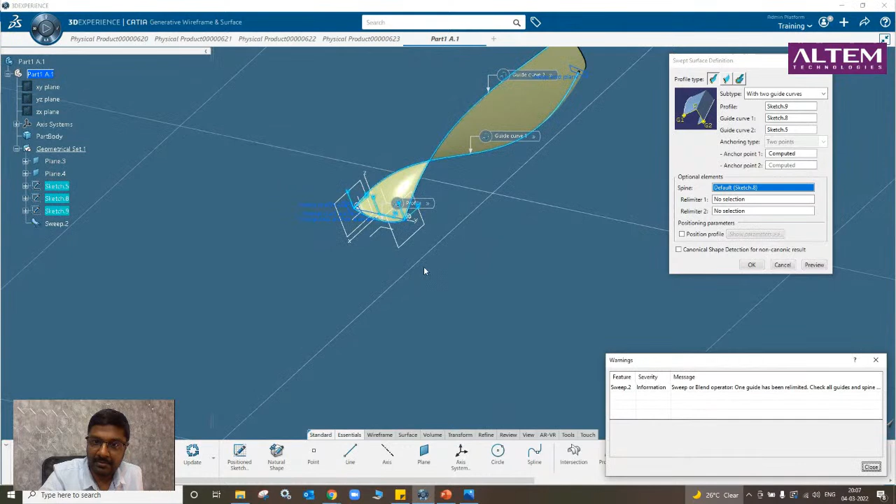So which is my profile? This is my profile, guide curve one and guide curve two. And if you give a preview, you can see this profile has tried to follow this guide curve also and this guide curve also, and there are options here. Okay, this is the explicit with two guide curves.

Let us see what is explicit with pulling direction. I got two examples.

I'll delete this. Okay, I will go for sweep explicit with pulling direction. So what I need here is one profile and one guide curve, and you need to define the direction. This is my profile, this is my guide curve, and I'm trying to pull the direction. I'm giving it as the z-axis.

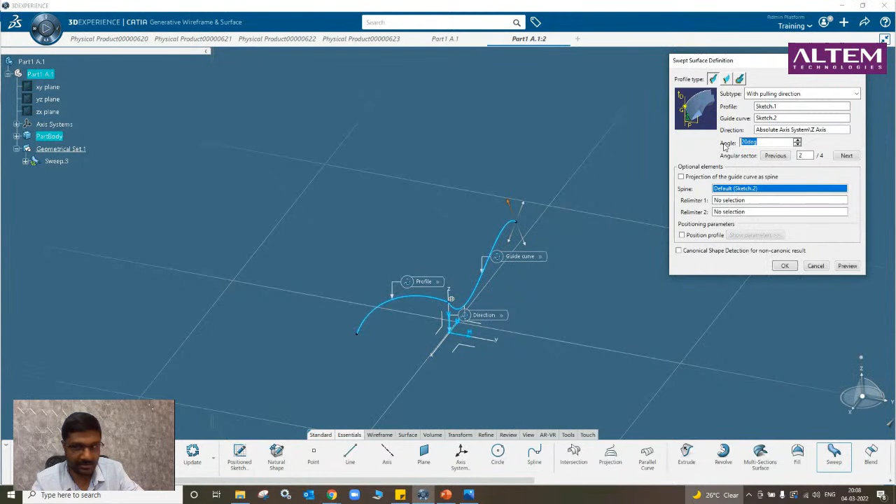Here there are four solutions, so whichever is the orange one, that will be my correct solution. The angle I have given as 20 degrees. If I give angle 0, there are going to be two solutions. Yes, you can see these two directions. If you provide the angle, it will have four solutions.

See, this has rotated also at 20 degrees. This is trying to follow this profile. This profile is trying to follow this guide curve in the z direction at an angle of 20 degrees. So this is our profile explicit sweep with pulling direction.

Okay, there are just two more, and we can complete this. What is the next option available? This is line sweep with reference surface. Let me import line sweep with reference surface.

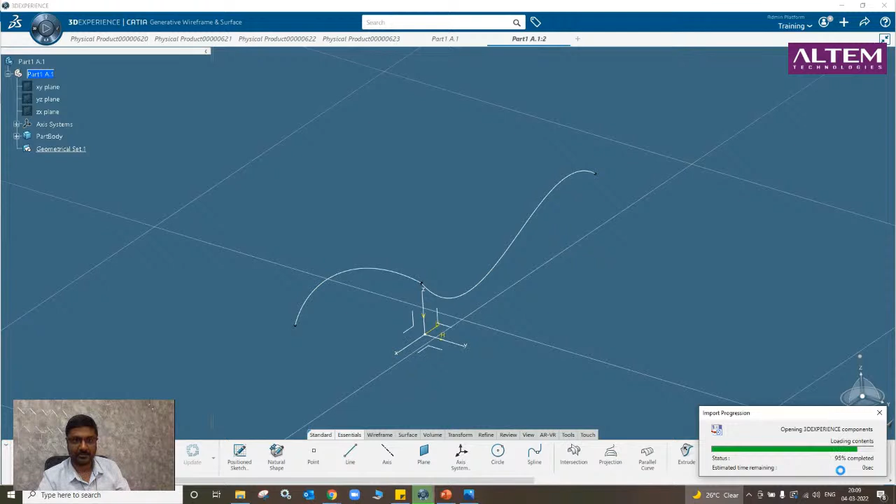Okay, sweep. So what is it asking? It is asking for a surface. I have already got a surface. It has got a guide curve. I have got a guide curve, and it is asking for angle. So guide curve and reference surface. I have given an angle of 45 degrees, and I have given length 1 as 100, length 2 as 50, and there are 4 solutions. I need to select whichever I want. This is a line sweep with reference surface that has been created.

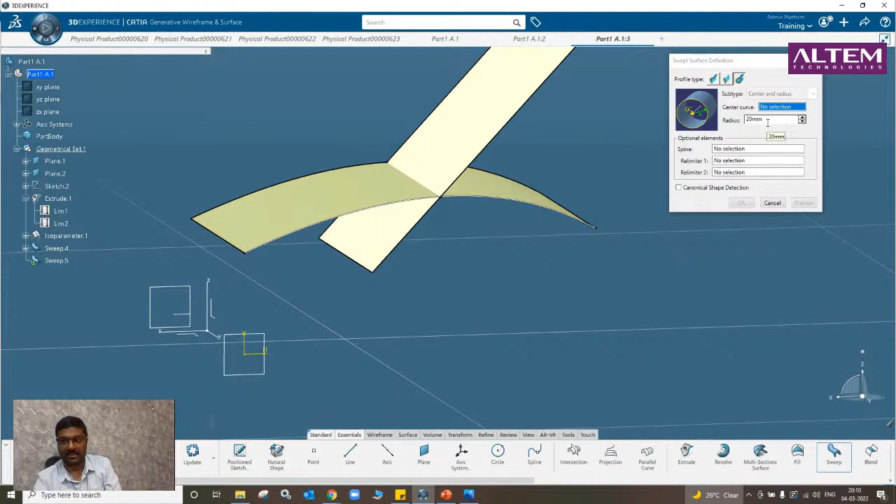Okay, it's fairly simple. Next, the last one is circular sweep. This is very simple. It's just a center curve and a radius, nothing else. Okay, this is fairly simple. Center curve and radius. I need to draw a line, point and direction. Yeah, line with point and direction.

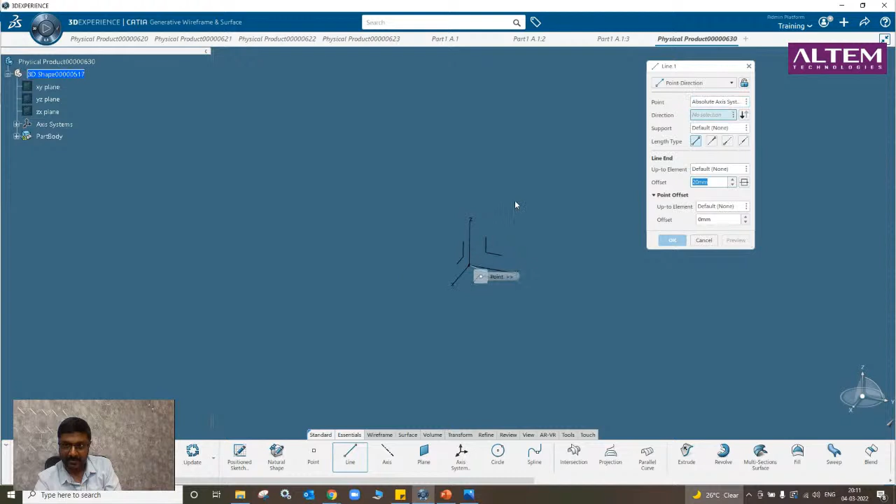Go to sweep and create the center curve, and it is asking for a spine. That's it. If you see the radius of this, it will be 20 mm. Just 20 mm. Okay. So this is all regarding the sweep. I hope I have covered most of the things. This is a very big workbench, surface design, and there are multiple options here. I have just gone through the overview.

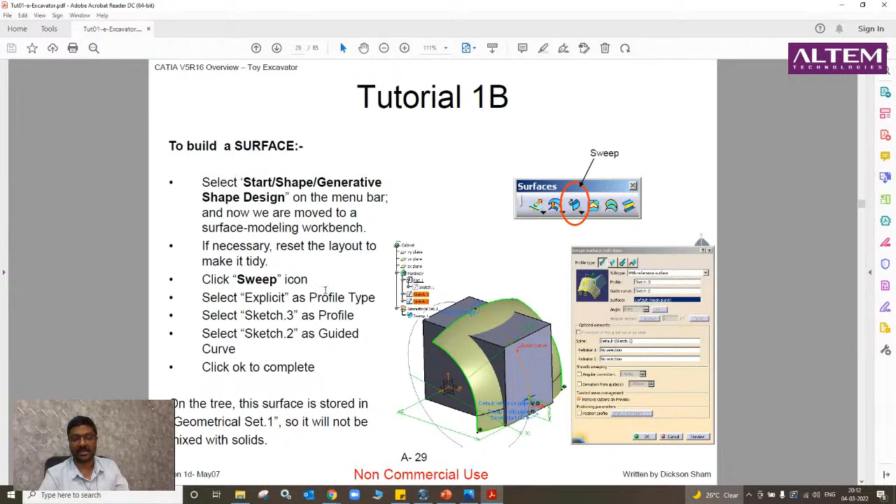Okay. So what is the use of this? If you go to the tutorial 1B, suppose you have to create this JCB cabin. It is a combination of part design and surface design. You will create a rectangular block, you will create a surface, then you will cut that rectangular block using the surface. The entire process is explained here. I will just show you.

So you create a pad, you create a surface, you create a split, you do fillet, chamfer. So the creation of this JCB cabin requires multiple workbenches. It requires part design and it requires surface design. Both of them can be combined to create the final product. You can follow this. It is very easy, they have given it step by step, and this is how you must practice and learn the surface design commands.

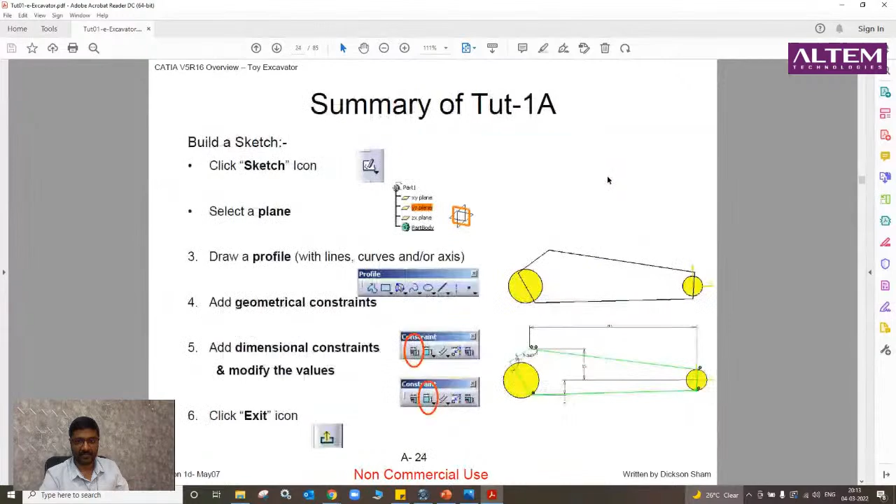Okay, I have just given you the overview of the features and the commands. Now it's your turn to practice and be thorough with the features and everything. I have tried to cover most of the commands here. If you need any additional support or help, you can contact us and we will try to help and resolve your issues.

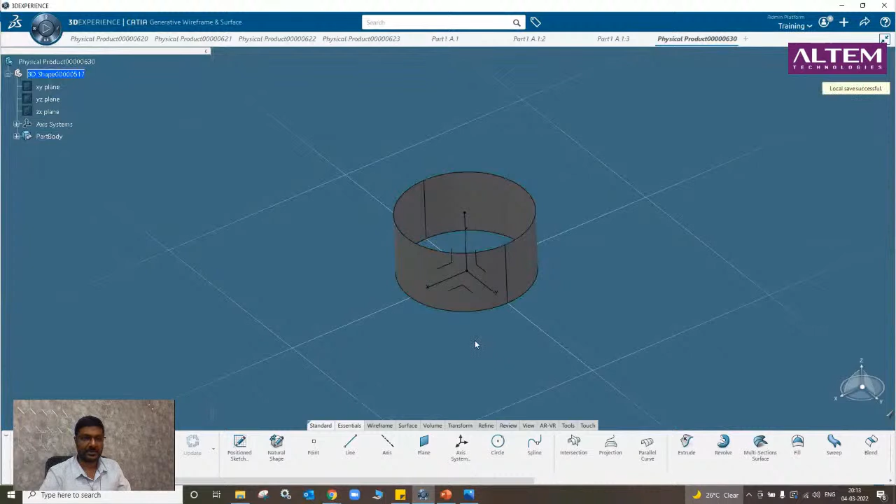So I hope all 5 days of the workshop were useful to you. I have tried to cover all the basic workbenches in CATIA, and there are many other workbenches available, but those are advanced. These five are the foundation. The other workbenches will be based on these. So it is very important for anybody to be thorough with these basic five workbenches. These are the most commonly used, and they will be a foundation for the additional workbenches.

Suppose you are going for mold tool design, machining design, or tooling design. There are different workbenches for different applications. These five workbenches are the foundation for all the other workbenches.